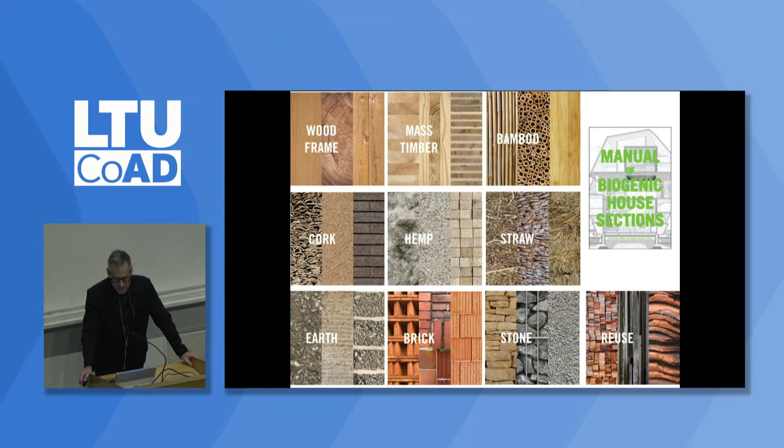So we're both excited about this and where it might go. The basis of the book is looking at nine dominant plant and earth-based materials, plus a final chapter on reuse. Reuse has always been present within our practice, as Carl mentioned. The cliche is that the most green building is the one that already exists. We know that, but it allows you to do other things.

It allows you to rework existing structures not meant for the purpose you're now adapting them for—in this case, a theater that had been turned into a department store, which we then figured out how to turn into a contemporary art center.

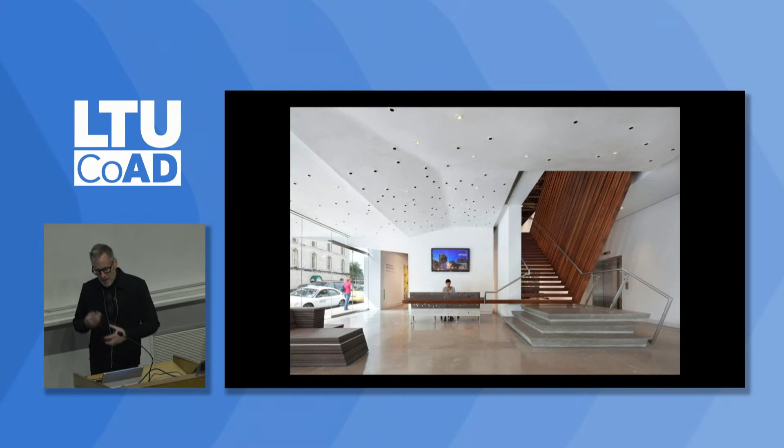There are really interesting possibilities that come from these inventions—looking at ways to reimagine the storefront from the 1950s department store as a site of contemporary art, thinking about tactical uses of staircases and vertical circulation to get up into the main gallery, and looking at ways to modify and accentuate the friction between what exists and what's new.

In this particular project, we were able to repurpose the building we'd already repurposed, modifying it about five years after we initially completed it by adding a rooftop deck, and thinking about how these urban buildings can have impacts back out to the street itself.

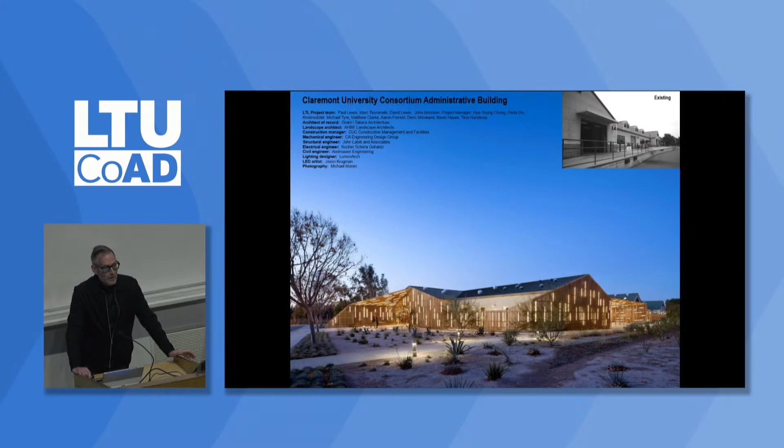This particular project was an administrative headquarters for the Claremont University Consortium. What was great here is that we were working with what used to be the maintenance building on campus. You don't get to do mostly column-free, 100-foot wide, 35-foot high ceilings in a one-story office building—you just don't.

But we were able to do it, looked at modifying it through bringing in light, had to put all the mechanical systems in the ceiling, developed a custom baffle to shroud some of this infrastructure, and that became the aesthetic of the entire project—making an open office for 100 employees because of the unique nature of the existing building.

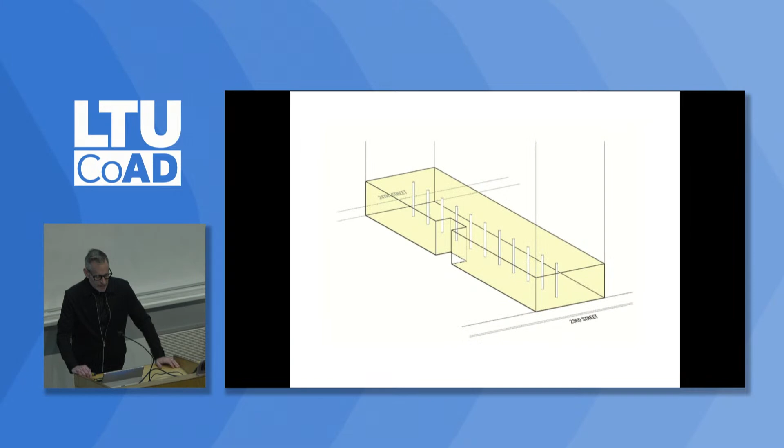A more recent project is Poster House. This is a through-block space between 23rd and 24th Street, and we had to imagine this as a site for a museum of the poster. We knew that would require museum quality controls in terms of humidity.

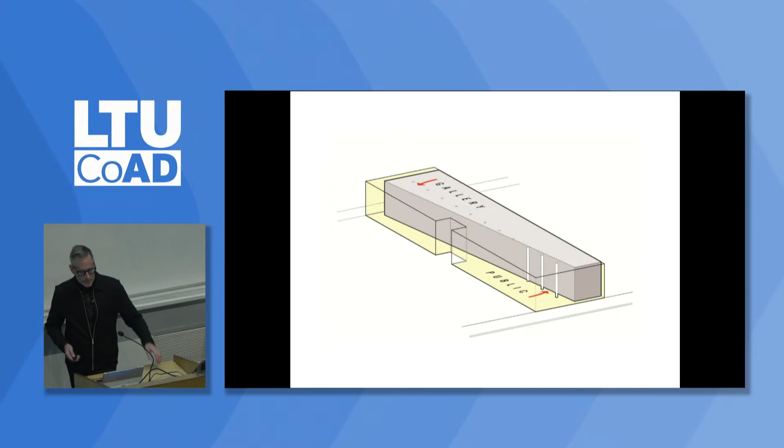So how do we find a way to let the pass-through happen, which was super interesting about this space, while having this acoustically and mechanically shielded gallery space within it—a kind of nested volume. Through various sketches, we looked at ways to strategize the relationship between a simple series of intersecting lines so they would focus on the door leading in from the promenade space into the gallery itself.

We developed the project with one part being about a 220-foot long piece of millwork. I'll say that 24th Street is about two feet higher than 23rd Street, so the floor slopes the entire way—there's nothing level in it. It was a bit of a challenge, but what we liked was the ability to keep the street. The site of posters is originally the street, so we wanted to have a street within a museum for posters.

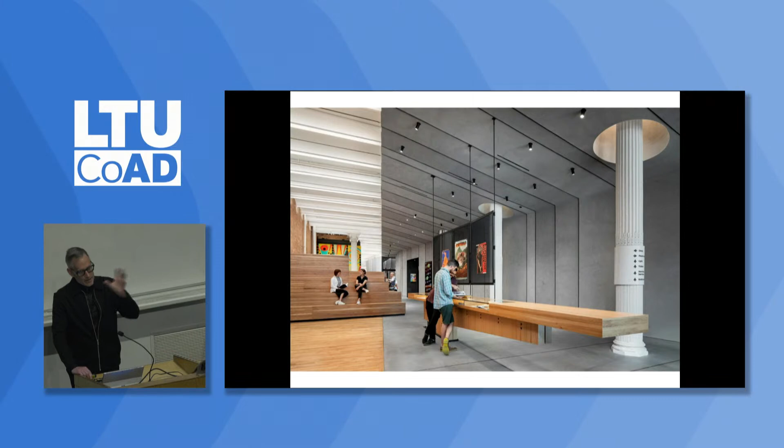But we got this interesting friction between the older shell and the new shell, which you see on the right—this kind of split screen effect between those two. Looking at healthy building materials, on the right is basically a clay surface, and on the left, most of the millwork was done with white oak.

The gallery itself is more conventional, but throughout the project we were looking for negotiations between the new pieces we would put in and the residual historical components here, the cast iron columns, illuminating the capital but also hiding it at the same time.

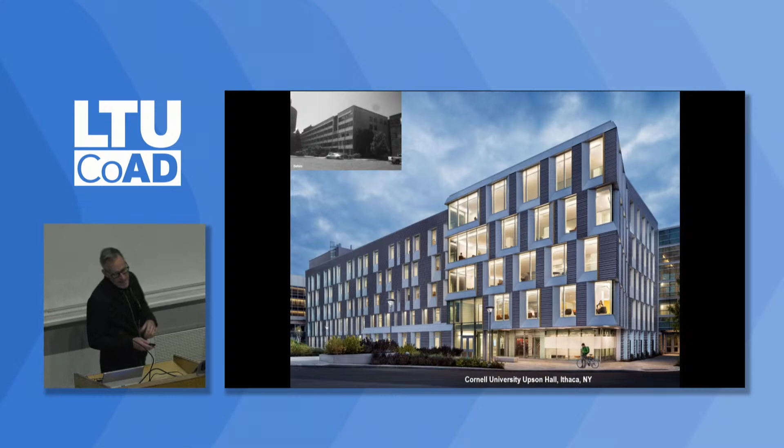Again, with a lot of this adaptive reuse work, the interest has been questions of operational carbon. We've been attentive to solar angles, performance, and insulation, and we've not been as attentive to questions of embodied carbon. I think this is something the profession as a whole has not focused on, and it's something we've shifted our practice to attend to.

So let me set the stage. What we're going to do for the rest of the talk is combine two different books: one is Manual of Biogenic House Sections, and the other is a pamphlet we did that developed five specific houses using plant-based materials as a catalyst for their architectural form.

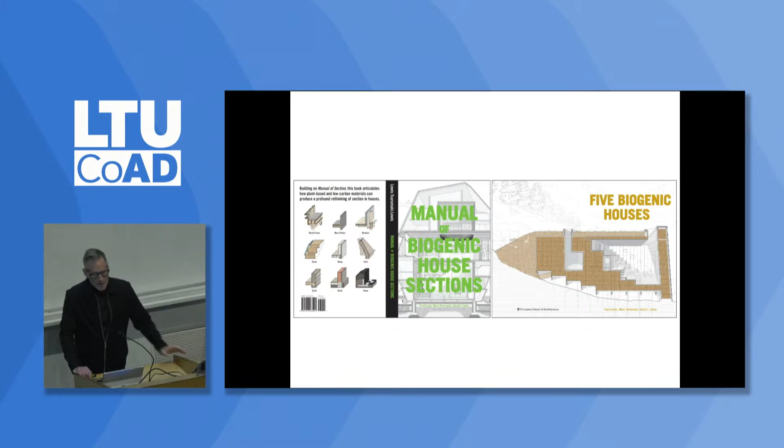But just to back up—this may be well known to you, and it's not an argument we're making, it's one that Architecture 2030 or the Carbon Leadership Forum or a number of organizations have made. But the short version, for those who've been living under a rock the last couple of years, is that we are not in great shape with the climate.

In particular, we're going to have to find a way that our policies get us to about a 65% reduction in 7 years—increasingly more dire and difficult to get to—in order to reach net zero by 2050. We know that buildings account for 39%. You've seen these stats before. If you haven't, you should have.

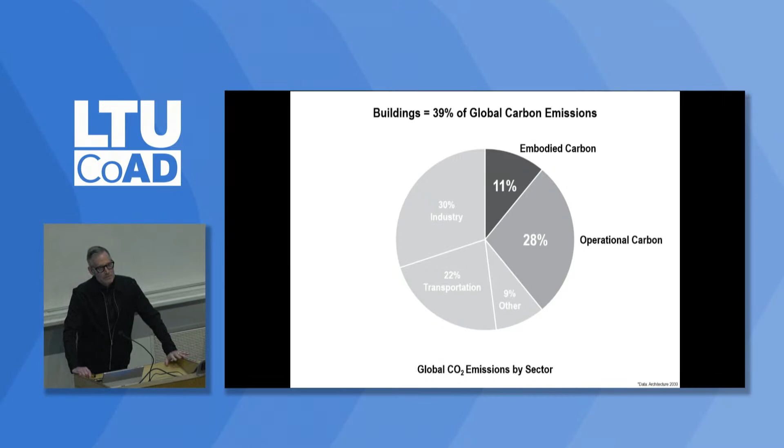Operational carbon, which has been the focus—the heat and energy that goes into keeping a building going—has been the larger chunk, but that's where most of the energy has gone. Embodied carbon, basically the energy necessary to build the building, the upfront carbon, the material, all the energy that goes into making the building itself, is only 11%.

The difficulty is that if you map out carbon emissions within the building world between now and 2050, about half of it is actually embodied carbon. So we're attending to only half of the problem.

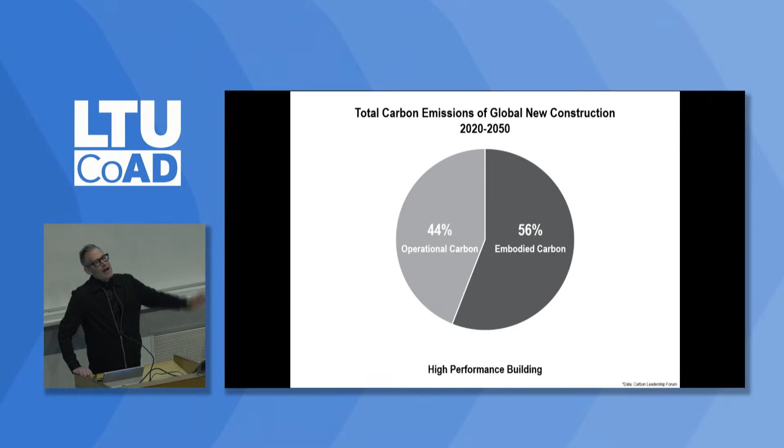And then there's the added difficulty that the more high performance you make a building, the more efficient it is, the higher percentage of that ratio goes to embodied carbon. So as we make better, high performance buildings, often with greater insulation, glass, and steel, we end up with buildings where the payoff time to get the return on that embodied carbon investment takes 30 years. That's one of the tricky things we're dealing with.

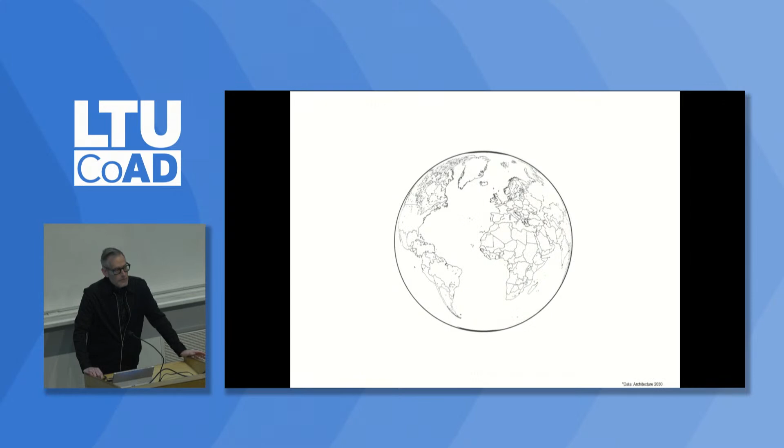The other issue is, as much as we love reuse, we're not going to be able to reuse our way into the future because there's just not enough building stock out there. There's demand for something like 2.5 trillion square feet of buildings by 2060.

So the question becomes, how do we rethink the legacy of modernism? Modernism, defined largely by concrete, glass, and steel, is highly dependent on a huge consumption of fossil fuels. It tends to be linear and extractive. It assumes a kind of global deployment of materials, and the question of environmental and health impacts have taken a secondary status to cost and, frankly, getting stuff done.

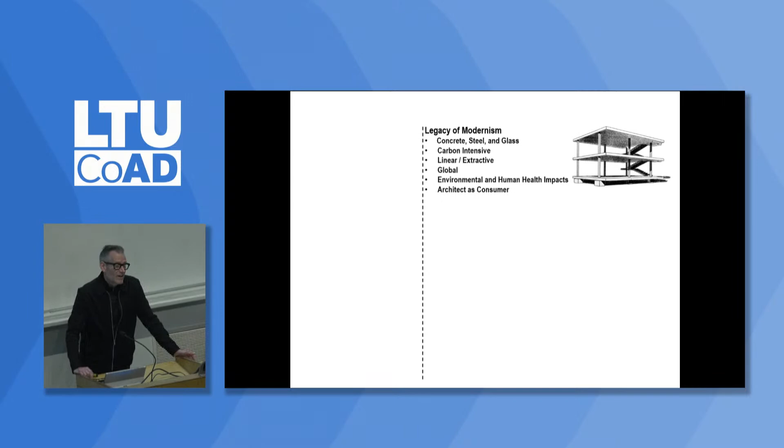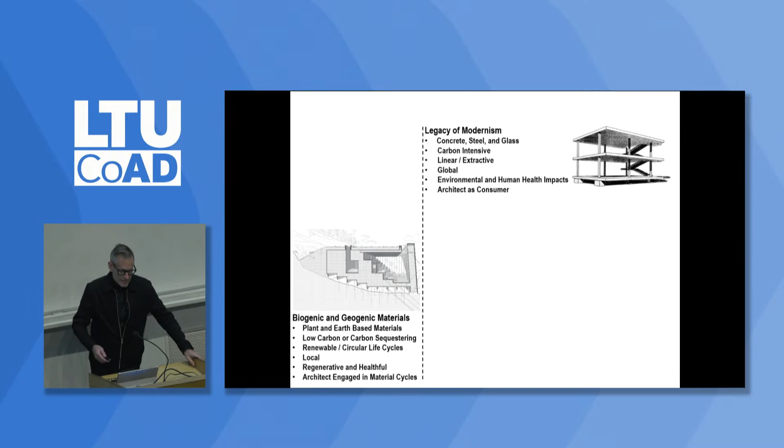And also, weirdly, architects just become consumers in this—we specify products. Instead, I think there's an optimism about a possible biogenic and geogenic future where we're working with plant and earth-based materials, low carbon if not carbon sequestering materials, thinking about the whole life cycle of those materials, trying to work local as much as possible, and getting the benefit of not only decreased carbon but also materials that are healthy both in their sites of production and their sites of use—so you don't have the off-gassing that you have with petroleum and chemical-based products.

That's really the focus of the book: what are the materials that are currently being used that are plant-based or earth-based material? What are their life cycles? And more importantly, how have they been used to make innovative buildings?

If we're not using architecture as a point of seduction, if we're simply reconstituting buildings from the 19th century, we're not going to get very far. Design doesn't have any agency if we're reconstituting models or building types that are just about a kind of return to some nostalgic past.

So one of the questions, I'm sure you're thinking, well, why the hell are we doing houses? We shouldn't be doing houses, we should be doing housing. I completely agree. The problem is that when we set out to do the book, we wanted to find examples of buildings that were built from these materials, and there are not a lot of housing or large-scale buildings that necessarily are built from these materials. So that was one factor. We wanted to draw buildings that already existed so we could prove and demonstrate that these can be done.

The second thing is that houses are a site of experimentation, and that's going to continue. We also had the fact that the book is a small format, and when you draw sections of houses, you can see the tectonics, you can see what's in the wall. When you draw big buildings, you can't see that, so that had an alignment.

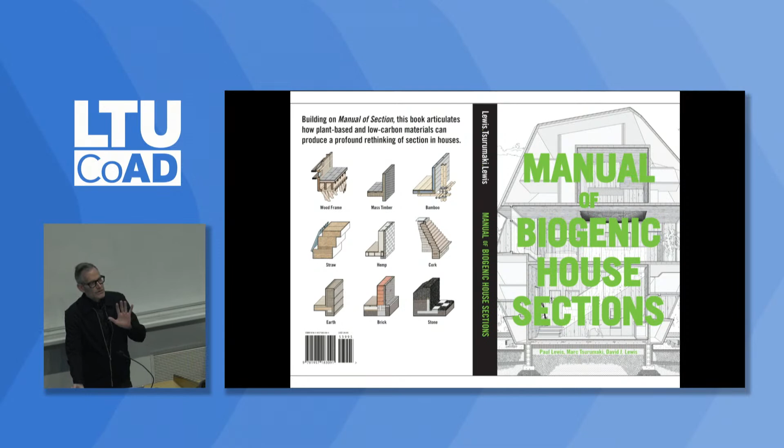We wanted to have a kind of typological consistency. And the other thing we were really interested in is looking at ways to argue for smaller scale buildings, right? So yes, houses are a problem, but a house that's 5,000 square feet is much more of a problem than a house that is 500 or 800.

Almost all the houses in the book are less than 1,000 square feet. So in a sense, the book is a critique of the current single-family home that exists in the States, which has ballooned from about 1,000 square feet in 1950 to about 2,500 square feet today.

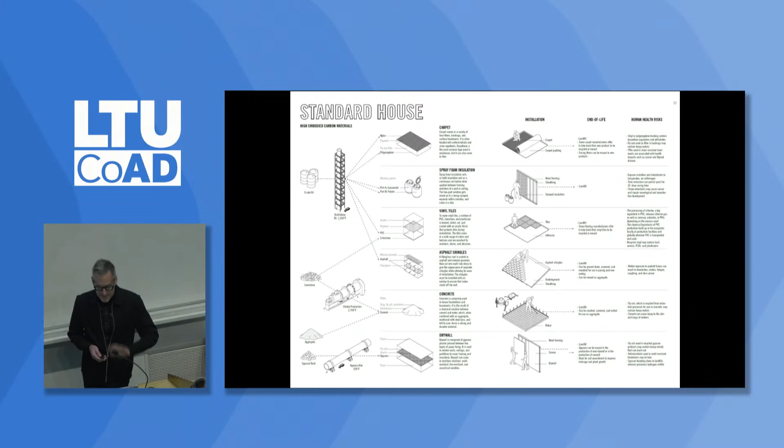There's an added problem in that most of those materials, in order to build a house that big, most of the materials are cheap, and most of those materials are coming from petrochemicals with all their attendant toxicity. They end up in landfills. I could go on at length about that, but basically it's a kind of limited life cycle, a kind of take, make, and then dump process.

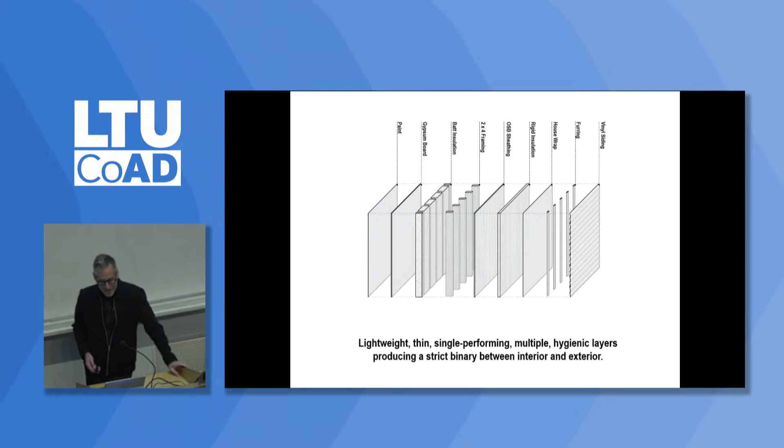They tend to be argued for their hygienic quality, and they set up a clean distinction between inside and outside. This assumption that your wall is basically going to perform and protect you hygienically from the outside.

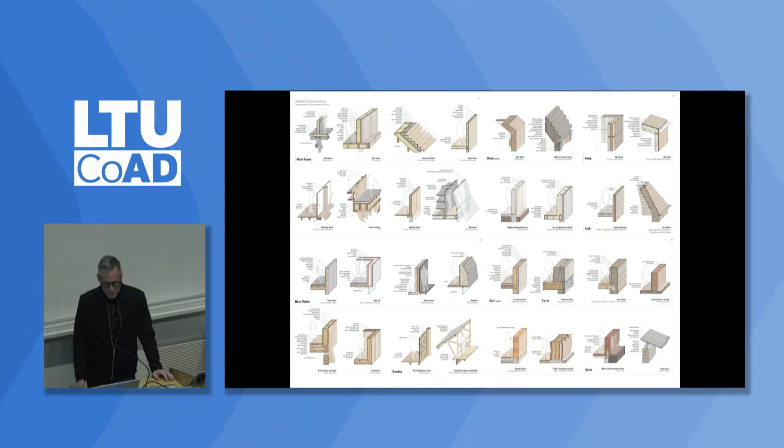Our interest in the book was to shift to things that were monolithic, things that were maybe more mono-material, heavy perhaps, and then possibly also regenerative, and to think about that as a kind of different model for how one would organize thinking about the architecture. So whereas Manual of Section looked at the role of section to generate the buildings, here we're looking at the combination of materials and also how they would produce, through their tectonics, through their inherent qualities, certain spatial consequences that were interesting.

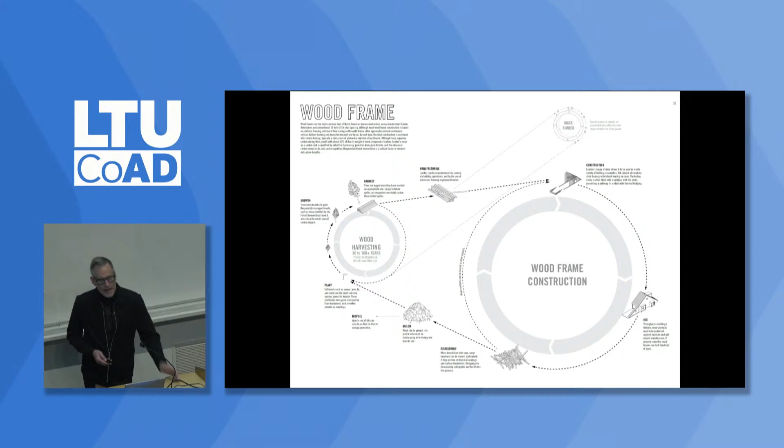Throughout the book, we start each chapter with basically a kind of classification of the carbon per meter cubed. We then map out where these things come from, what are their material paths from plant to construction, how do they get reused at the end of life or different cycles within this system. But also look more closely at what are the specifics of that plant, what are the basic steps by which you go from tree to different forms of lumber, and what are the dominant models there.

This is not meant to be exhaustive, but it's meant to give a sense of how these things go from plant to building. Each chapter has about 4 to 5 houses that we've documented through new exploded axonometrics to show what the house looks like in plan and three-dimensionally.

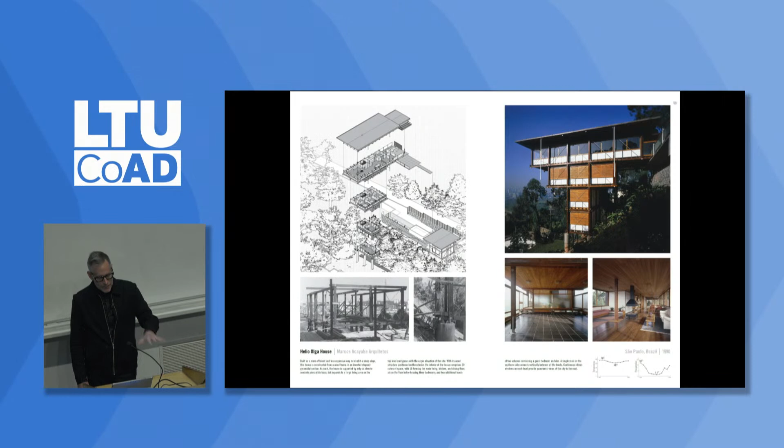We have construction photographs on the lower left, exterior photo, interior photo, and most importantly, this cross-sectional perspective that we've drawn by modeling the house in detail, having an interesting exchange with the architects.

Many of these houses are not iconic, and it was great to work with 55 architects around the world to get them to redline our drawings to make these as accurate as possible for the purposes of the book.

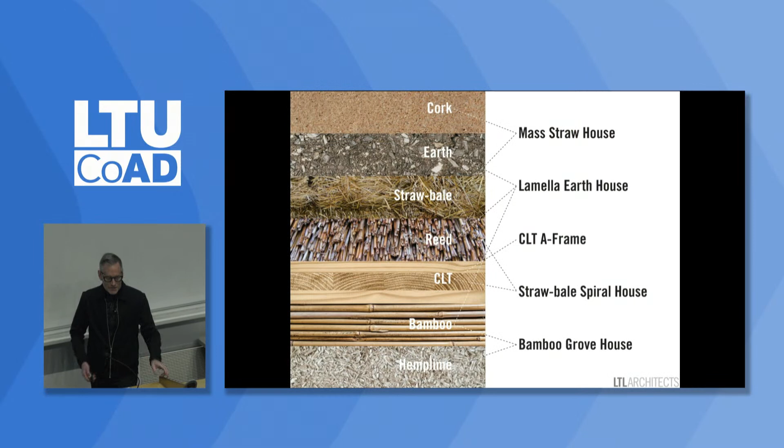As I mentioned, at the end of 4 years of working on this book, we wanted to design our own, we kept asking, what will we design? So we designed 5 houses that look at combinations of different materials and how those could be a source for invention. I'm going to go through a couple of these different chapters, show some examples, and show examples from our own work as well.

Mass timber: if you're a student, you used to be asked, what is your Rhino model made of? And you'd say concrete. Now you say CLT. So it's becoming the default.

Look, mass timber is fantastic. It's the poster child for plant-based materials, and it's a lot better than concrete and steel, but it does have its problems. What's great about it is that it's easily 10, 15 years ahead of where all the other plant-based materials are in terms of code, approvals, client acceptance, fire, all that kind of stuff. So it paves a path forward.

But it takes a long time for a tree to grow, 30 to 100 years. Even with Forest Stewardship Council certification, you're often getting as much carbon loss from the destruction of the soil. When a tree or a forest is harvested, you're often only using maybe 50% of that tree, so it's a wash at best.

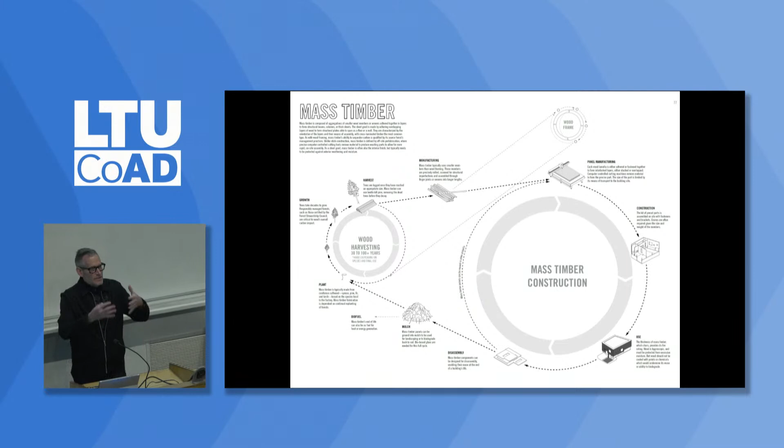There are attempts to make that better with different models like mass plywood, but it's not going to save us. Mass timber is great, but it's not going to save us, and there's not enough trees in the world to do all the buildings with mass timber.

Adhesives are a problem, so working with dowel laminated products that don't require the adhesives. There are soy adhesives on the market, which are exciting, but we're still trying to figure out where this goes next.

Most mass timber is simply a replacement for the logic of post and beam, which I think comes from other forms of construction. We became really interested in architects using mass timber for its own qualities, the idea of a sheet good that is structural and can be milled.

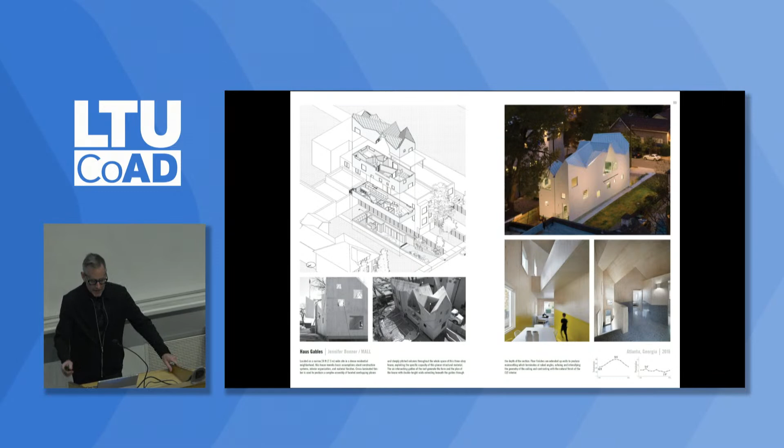Jennifer Bonner's Haus Gables is a fascinating house able to develop a complex roof gable system because of the specifics of the CLT sheet good itself. The house's whole geometry is based on multiplying these gables, and it would only really be possible at this level, scale, and speed of erection through the use of CLT.

The project that we put on the cover of the book, Ateljé Sotamaa's Meteorite, is a really weird building. If you look at it closely, you wonder, what's going on here? There are 2 layers of CLT, an inside layer and an outside layer.

That whole buffer space you see in the section is basically insulation, an air cavity that's not filled. It's essentially 2 skins, the entire building is 2 surfaces of CLT, and the outer surface just has a stain on it. Super fascinating.

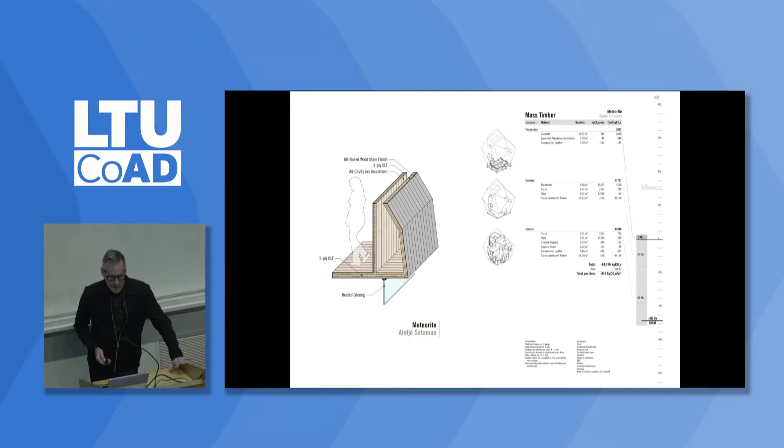It gets rid of all those layers, and it also sequesters about 48,000 tons of CO2 - actually 48,000 kilograms of CO2 equivalent.

For a house we called the CLT A-frame, we wanted to go in the other direction. Rather than milling CLT into all kinds of different parts, we thought, why don't we just use the entire sheet? Let's base a project on taking the full blank, 10 feet wide, 50 feet high, and just setting them off in pairs. At the back, you'd get 2 that would be stabilized by the cross bracing of the stair.

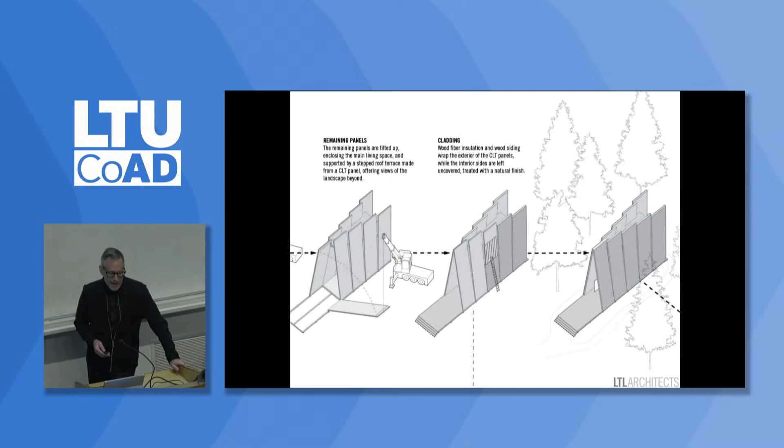And then as they work their way to the front of the house, they just basically lean into each other. At the top, you get this kind of crow's nest, an occupiable space that allows you to look out into the landscape. And on the inside, the great thing about CLT is you don't have to use gypsum drywall, and you get the finish of it.

We also like the peculiar nature of this incredibly tall, almost 50-foot high ceiling, one-story space, which took the A-frame and essentially moved it into a very, very different direction based on the logic of CLT.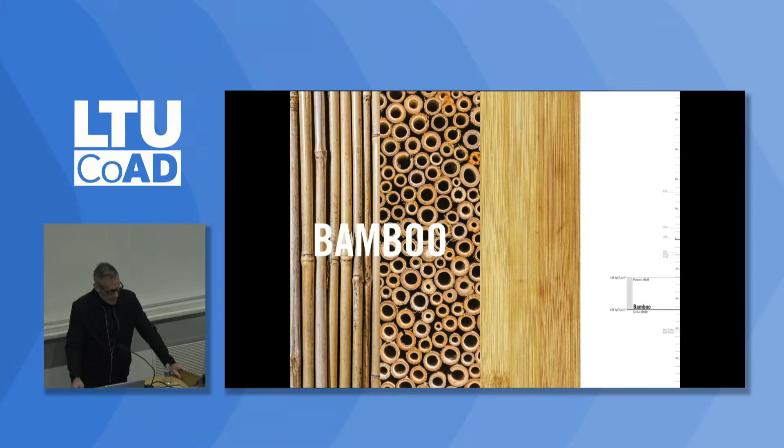All right, bamboo. Bamboo needs a lot more different ways to use it. We're just starting to see different materials that are able to work with bamboo productively. But where CLT is limited by the slow speed of trees growing, bamboo is one of the fastest growing plants on the planet. It's super prolific, and it has a higher rate of carbon sequestration than wood.

I think you can grow something like 30 feet in 3 to 5 years, harvested not by clear cutting. You basically get rid of one culm among a group, so it's constantly regrowing itself because the rhizomatic root structure remains. It tends to be cut into smaller strips to be glued together, so the question of the adhesive is one of the key issues.

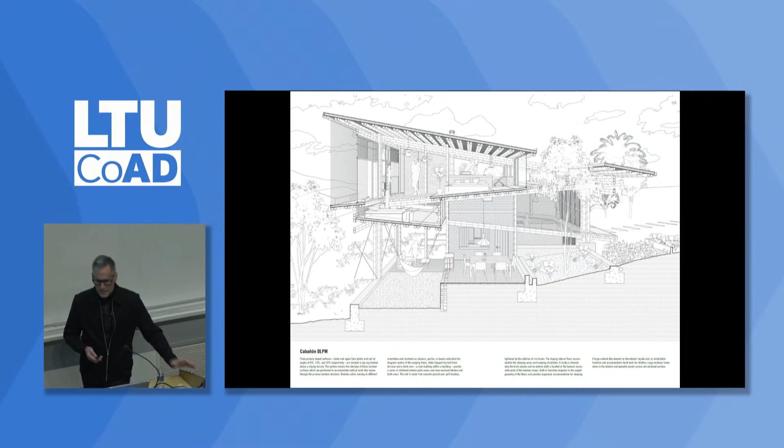But you can also use the culm as a full structural component. Even though it has natural variation, it can provide structural approaches and be tethered together. So this house in Ecuador basically uses the bamboo as a structural frame, interestingly producing a kind of cross bracing that is also the circulation and the floor structure moving up through the house. It's kind of a fantastic inhabitable incline plane moving through the domestic space.

Or in Anna Heringer's housing prototype, you get a weave of bamboo forming a very unique, unprecedented external skin that protects against the initial impact of the elements, a light solar screen that protects a little bit the rammed earth sleeping interior. But the skin would only be possible due to the flexibility, cheapness, and strength of bamboo.

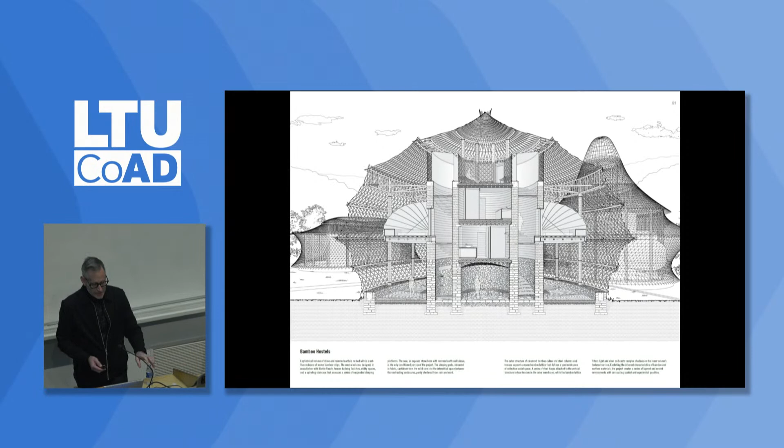All right, so earth. There are people doing fantastic work with earth. It's exciting to see how it's starting to emerge in different forms. It's everywhere, one of the oldest building materials. Its thickness can work structurally as thermal mass. It can absorb and balance humidity.

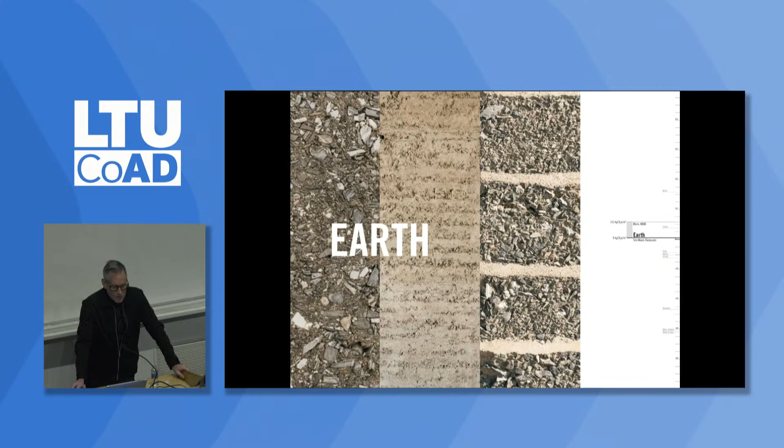Typically, it's better if clay is the binder itself, and then your carbon emissions are quite low, particularly if it's acquired locally. Unfortunately, a lot of rammed earth we know about is dependent on fairly high levels of Portland cement. So the question is figuring out a better, lower carbon binder, whether it's lime or just the clay itself. But it's great because it moves from a liquid to a solid state.

And so you get this interesting possibility of how do you, as a designer, work at those different stages. Is it with the block? Is it with the wall? Is it with 3D printing?

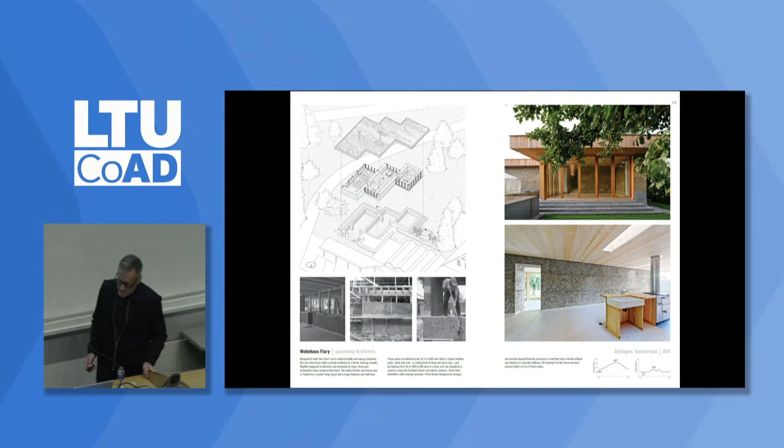One particular house that we really liked, the Wohnhaus Flury, was really a combination of earth loam with straw, a kind of cob wall, and it was just cut with a spade. These are about 32 inches thick. But you get this fascinating contrast between the roughness of this spade-cut, very thick wall, and then the timber ceiling and floor. The sandwich of the ceiling and floor is then filled with straw, so it's also a straw house.

As the insulation, you get the large overhangs that protect the earth walls from erosion from rain. So it's basically a single finish that's structure, cladding, insulation, and interior finish, although the structure is augmented by a series of 2x studs located within the thickness of that wall.

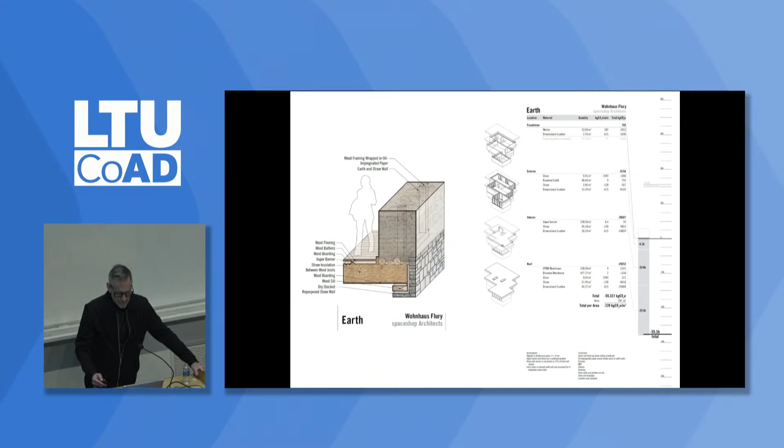And I think at this point, one knows a lot about, you see a lot of 3D printing. There's not as much 3D printing with clay. I think there's some experiments being done in this building on it, so I'm excited by that.

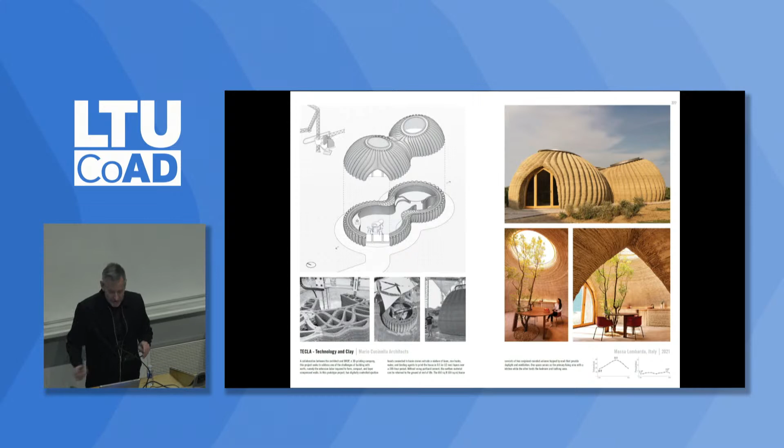And I think this is super interesting. So a group out of Bologna, Italy, WASP, working with Mario Cucinella Architects, 3D printed this house in about 200 hours. There's the duration, about a half-inch layer over time.

And it's as a test case, it was fascinating, in part because the walls were hollow and then filled with rice husks to form the insulation. So the 3D printing allows you to have greater structural capacity with reduced weight, and then be able to look at the walls as being insulation as well.

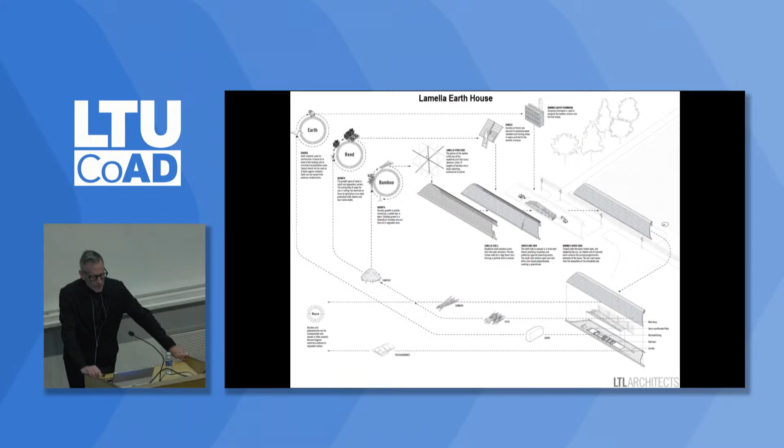All right, so we wanted to find a way that we could work with both bamboo and an earth house by nesting one inside the other for this kind of new model of a farmhouse. And here we are looking at ways we could produce an outside shell, a kind of lamella structure, which is basically an interlocking of self-similar lengths of 8-foot bamboo with similar joints that would then be assembled together in a diagrid weave, allowing us to develop relatively inexpensively and quickly a single spanning space.

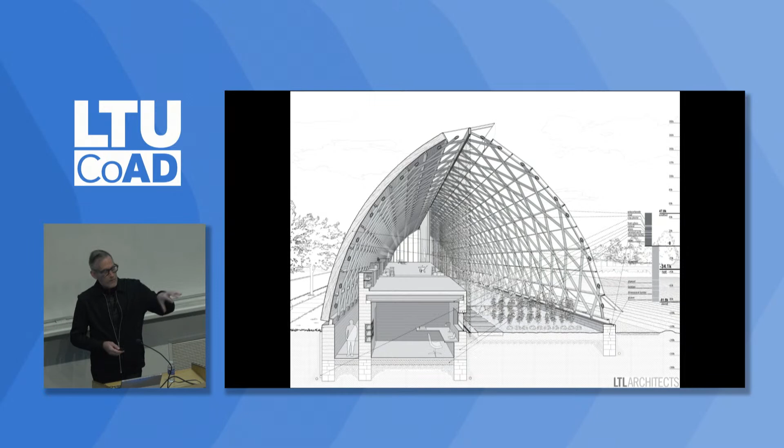And then placed inside of that would be an earth-based house, largely excavated from the ground and also embedded in that ground, which is where the domestic space would occur. So you get basically a gradient of temperatures between the outside and the inside, this interesting play between what is a garden, what's a greenhouse, what's the actual house.

And you also get this 30-foot by almost 300-foot long space that's quite large, efficiently done. The north side was clad in thatch for insulation, and the south had a plant-based polycarbonate to help facilitate the greenhouse performance.

All right, so the last three materials that I'm going to go over are all ways to think about insulation. And I know everyone's, as soon as you say that word, everyone gets excited. It's insulation. Oh, it's the best.

So how many semesters of insulation do you study? All right, I ignored insulation for most of my career, right? It was just an R value, right? You just wanted an R value. You never saw it. It was in the wall as long as it was cheap, and that's all that mattered, right? Unfortunately, insulation is actually where a high percentage of carbon has to be located.

And most of the insulation products that are on the market now—spray insulation, XPS, EPS, batt fiberglass, et cetera, mineral wool—these not only have high carbon emissions, but they're also often very toxic. If you've ever worked with batt fiberglass and you come away feeling bright and happy, you're not doing it right. It is awful. It's really nasty stuff to work with.

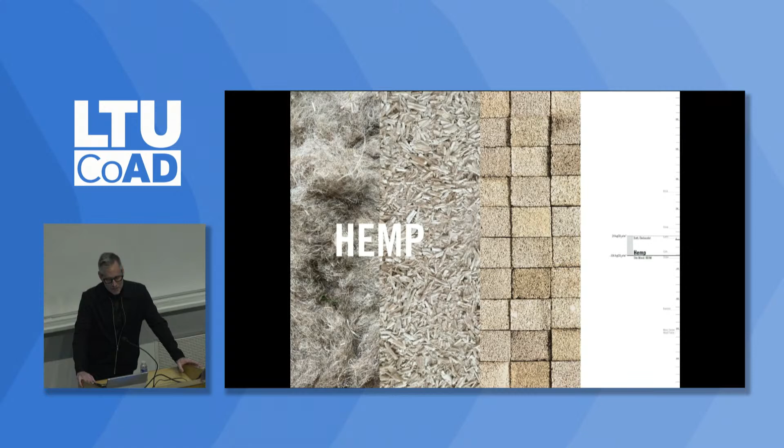And if you want to have some fun, just try taking a match to any XPS and see what happens. It burns like you wouldn't believe. So there's trying to think about what are the possible replacements for insulation and what that would mean for the nature of the wall.

Hemp. Hemp is pretty incredible, right? It grows quickly, about a foot per week. Reaches maturity in about 3 months. There's some places that you can get 2 growing cycles in a year. It has a long root system. It can actually help regenerate soils, grown with minimal water, fertilizer, and pesticides.

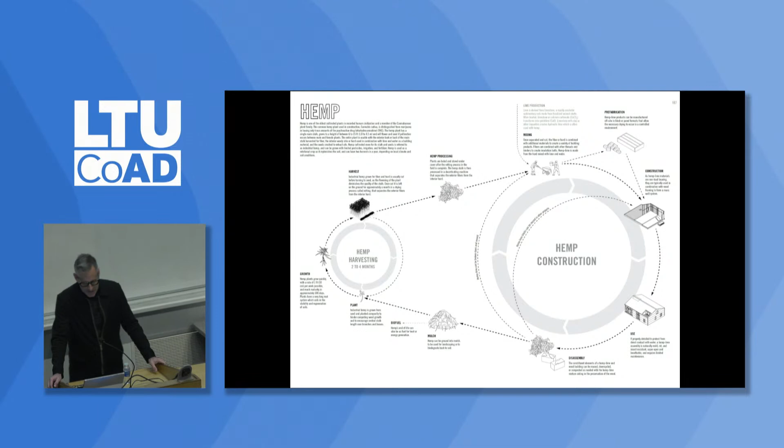In order to translate hemp into an insulation, you either work with the fiber itself and turn that into a batt insulation, or you separate the fiber from what's called the hurd on the inside, shred the hurd, and combine that with lime to form a kind of hemp lime, inappropriately sometimes referred to as hempcrete. It's not a replacement for concrete, it's not structural, it's an insulation. It's the air cavities within the fiber that help it resist thermal heat transfer.

It can be sprayed on site, it can be compacted on site, it can also be formed into blocks, packed into walls, prefabricated, et cetera. Hemp has a lot of possibility. One of the downsides to hemp is that you have to grow it in fields that might have been used for something else, so there are some displacements of agriculture that have come from hemp, but it has regenerative capacities as a plant.

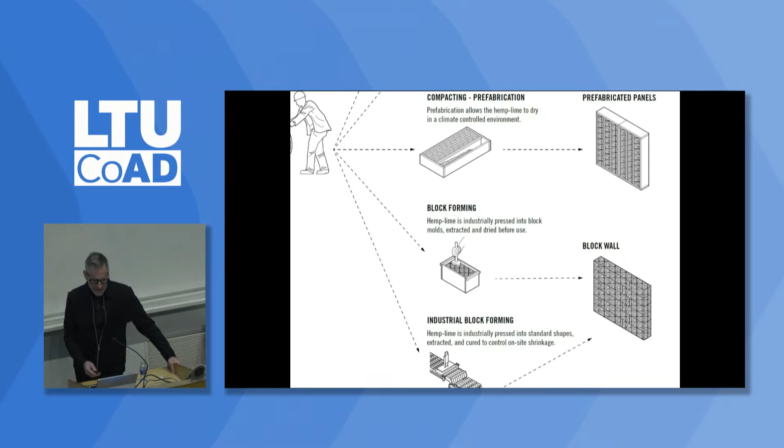The second type of insulation is cork. Cork is amazing, it almost does everything. It can be structural, it's water resistant, it's thermal, it's antifungal, it has acoustic properties. If you like the smell of cork, it has great olfactory benefits, and as I mentioned, it can be structural.

The downside to cork is there's only so much of it, and it takes a long time to grow. It's carved off the bark of a cork tree, and tends to only grow in the Iberian Peninsula, so Portugal and Spain predominantly. Most of the cork used in architecture now is the excess of the wine bottle stopper industry.

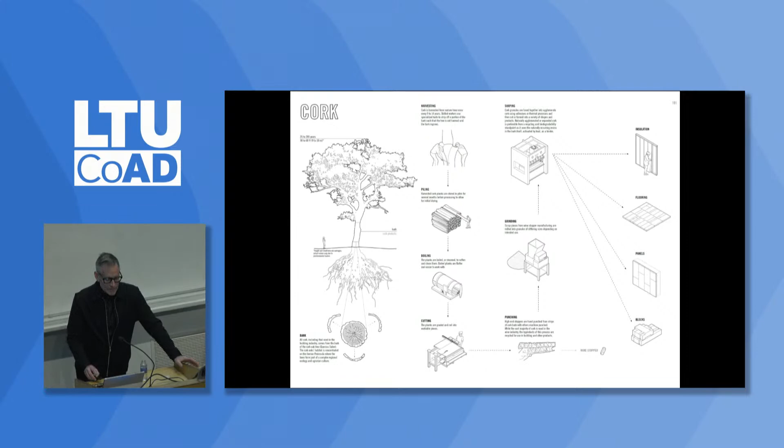So, all right, that leaves us with the third material: straw. And so the rest of the talk, as Johnny knows, is all going to be about straw.

Straw is everywhere. It's a waste product, it is not being used. Right now, the amount of carbon sequestered in straw around the world is estimated to be about the same as the carbon released in the making of concrete in any given year. So if one talks about carbon sequestering technology, it already kind of exists, it's there as straw. We just haven't harnessed or found a way to embed straw within building materials in a convincing and effective way.

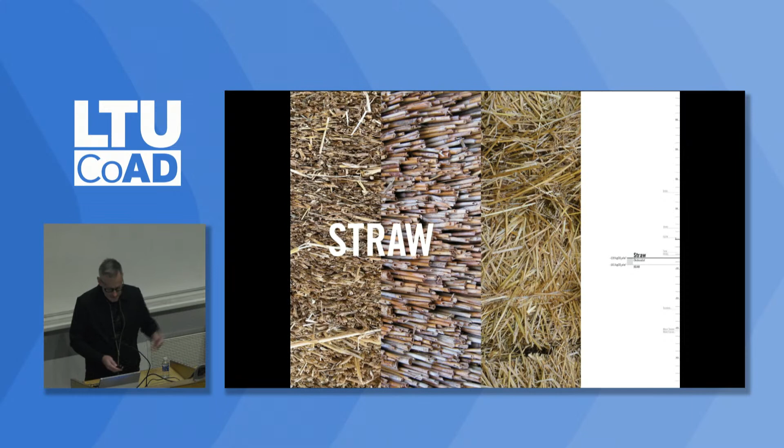Most straw is left to decompose, it's not really used as much. It's used as a kind of animal bedding, but most of it is left to decompose or burned.

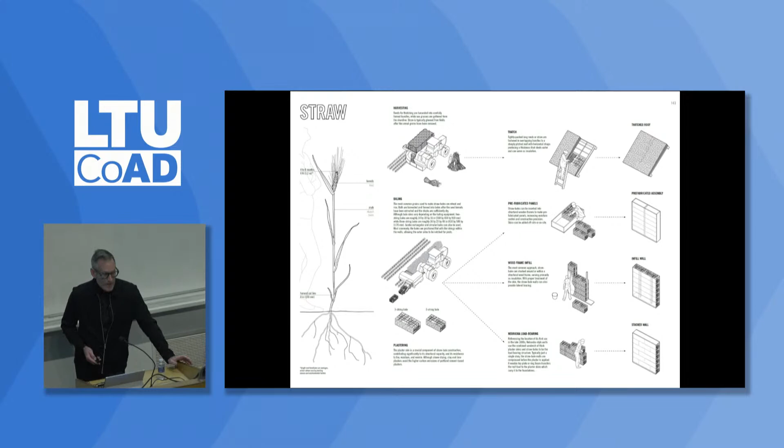It's fast, it's cheap, it's plentiful, it's resistant to rot, and it can not only be an insulation material due to the air voids within the straw, but if sufficiently compressed, it can be a load-bearing material. In fact, one of its early forms, the Nebraska wall assembly system from over 120 years ago, was because you were working with straw bales. Those bales come compressed out of the machine at a sufficient level to be used as a building material. Historically, straw is stacked up as bales, a convenient form, and then plaster is added to the sides, about an inch if not more.

That plaster, whether clay or lime, forms the resistance to fire, rot, moisture, insects, etc., and helps resist the vertical load. In the California Building Code, where a straw bale is incorporated, it's because of the plaster that it's able to work. That's not the only way - you can embed straw within an existing stud wall as insulation, or it can be formed into prefabricated panels, whether 2x panels or cross-laminated timber.

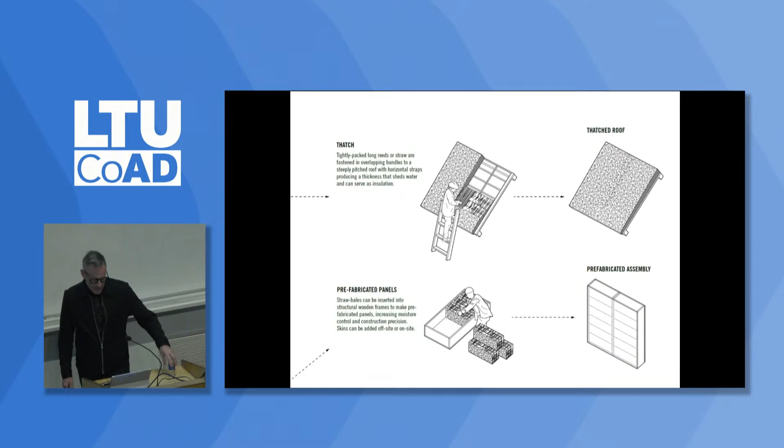Thatch is slightly different, I won't talk about it too much. One of the most interesting examples we came across was Atelier Schmidt's Gartist House, which uses jumbo bales. These are really big bales, 30 inches by 50 inches by 100 inches, 650 pounds each. The baling machine produces them at a density where they're actually load-bearing, so you can corbel the ceiling out of these. There are rings of CLT at every four blocks to help stabilize and tie them together laterally.

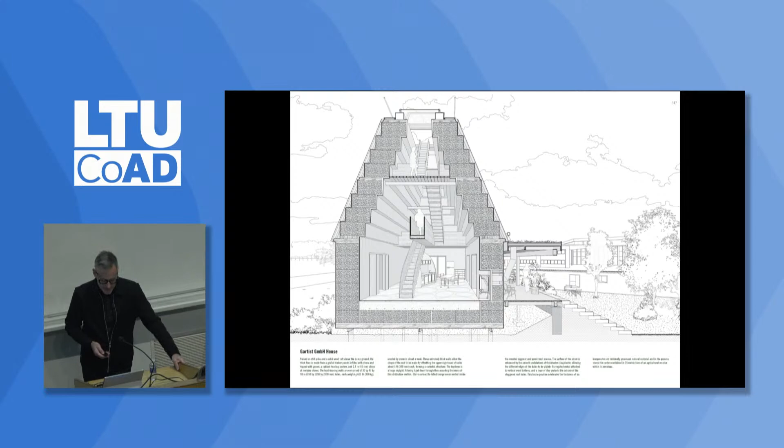Effectively, the load is carried not by the skins that are put on, but by the straw, and then they're clad on top with metal cladding to protect the plaster. It's a super thick building, and it sequesters about 84,000 kilograms of CO2 in this relatively small building.

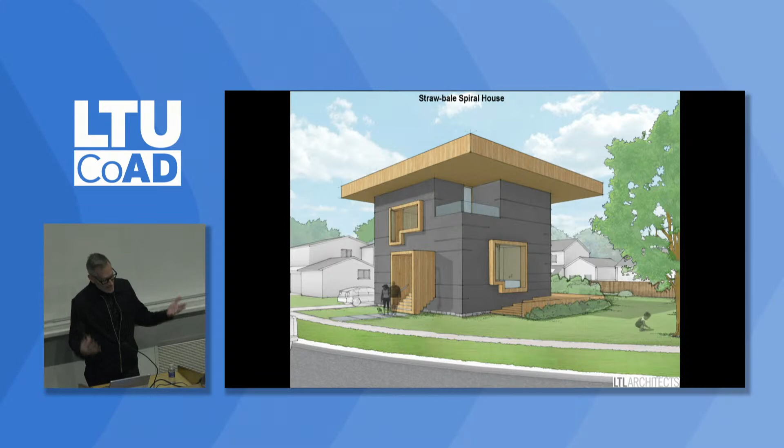So we became super interested in straw and wanted to figure out a way to use this thickness not as a problem. We've been taught for the last 100 years that thin is better than thick, lightweight is better than heavy - the legacy of modernism, as if it's unquestioned. The idea that you could have a thick building that sequesters a huge amount of straw, a material that isn't that expensive, became kind of intriguing to us.

So what happens if we started to combine straw as a solid and thought about it as something you remove items from, rather than building through addition, but design through subtraction - combining a kind of void within a dense thicket of straw. You combine those with voids of cross-laminated timber.

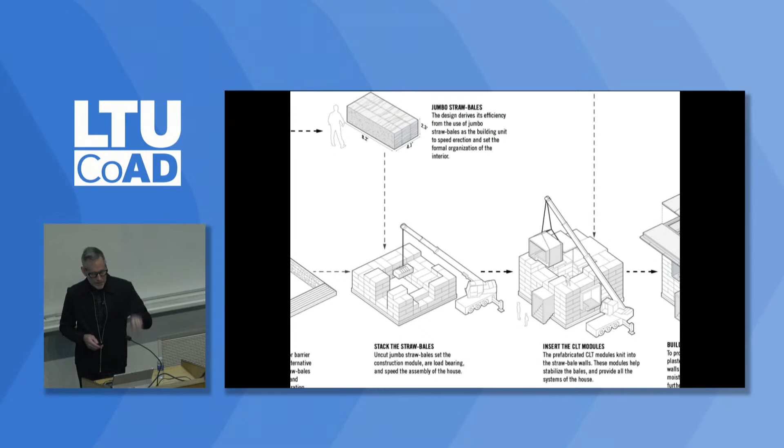So in a sense, this house is based on placing a series of cross-laminated timber, four-sided, relatively small rooms that are then positioned into voids within this otherwise solid donut of straw. The CLT is stitched together, so it helps stiffen the straw, and the straw helps stabilize and position the CLT.

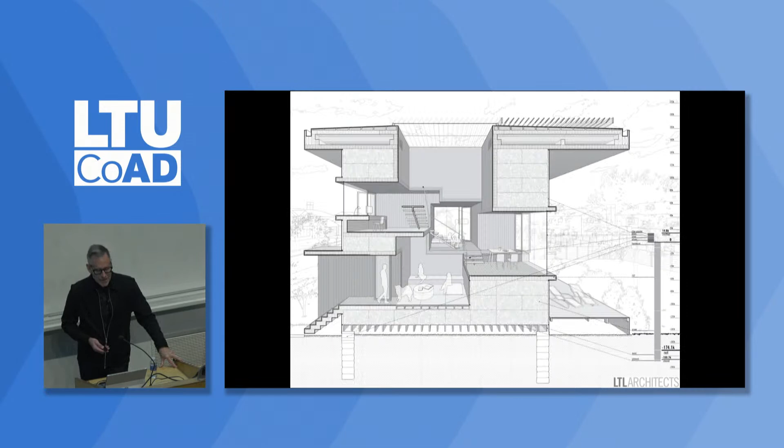There's a central skylight, large overhangs to protect the clay plaster on the straw, and the central skylight brings light down to the middle. You essentially get this sequence of rooms carved up through the thickness of the straw, so in a sense it's a kind of Loosian space wrapped around the inside of this relatively small house.

You go from the door all the way up to the roof terrace, walking from room to room, if you will. We really like the idea that the window, the space, the CLT room, and the apertures and voids within the straw are all one and the same thing. So hierarchies between different parts of the architecture start to get reworked in different ways.

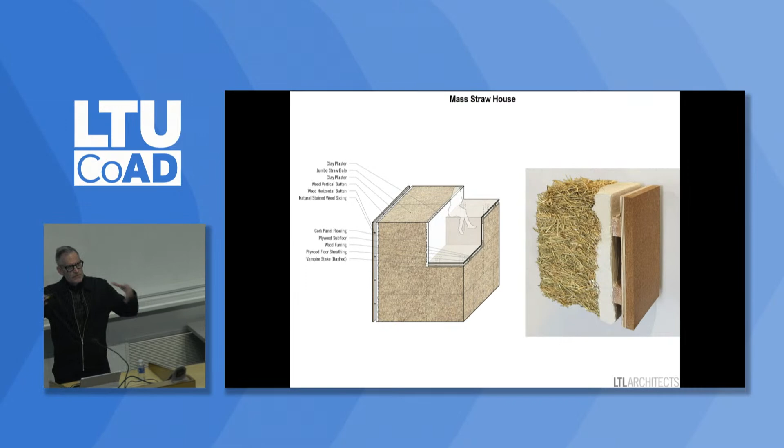The other straw house we looked at combined two different strategies for working with straw. One was a set of walls running a kind of corbelled wall perpendicular to the contours of this hill, and the other was this thickness or podium of straw carved in a way a bit more similar to the last project we showed you.

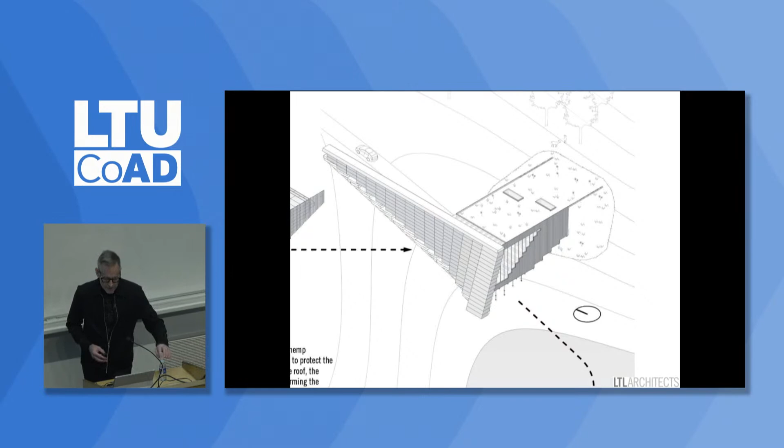These two masses of straw would then be tied together through roof box beams infilled with straw, with a roof basically clad in clay plaster, and then another layer of straw, unprotected, on top of a series of hemp fiber panels. We like the idea that that top layer would actually decompose.

You often get the question, aren't animals going to eat this? And we're like, yeah, they don't eat straw because it's not hay. Hay is a vegetable, straw is not. But nonetheless, if they wanted to, that's fine—we'll let them eat the roof, or burrow their way into it. We like the idea that the building would blend itself back into the landscape.

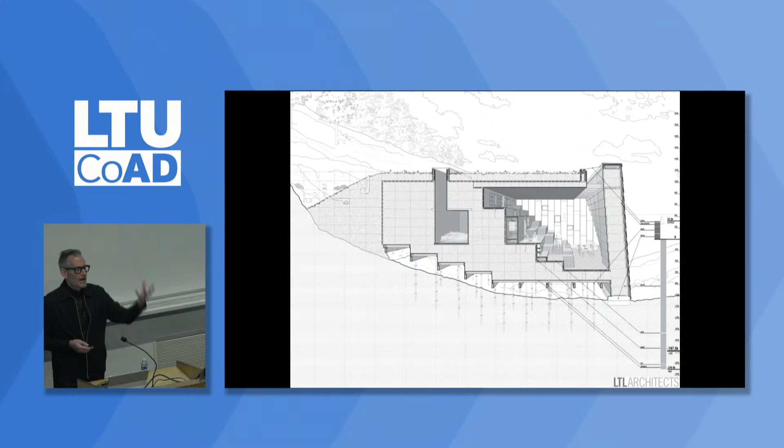But then you get this interesting dynamic between the collective space for the house, more like a terraced landscape between these two straw figures, and the private bedrooms and bathrooms carved back in with skylights—really quiet. Can you imagine, and I think it's probably the New Yorker in us wanting to get away from noise, that these would be incredibly quiet rooms.

We really like the fact that in this section, there's almost as much mass and straw as there is space. It's all on screw piles, reducing footprint by getting rid of as much concrete as possible.

So anyway, these were experiments trying to figure out how we could imagine an architectural set of inventions that come from the material, not just using those materials as a replacement for existing high carbon materials, which we thought was really important.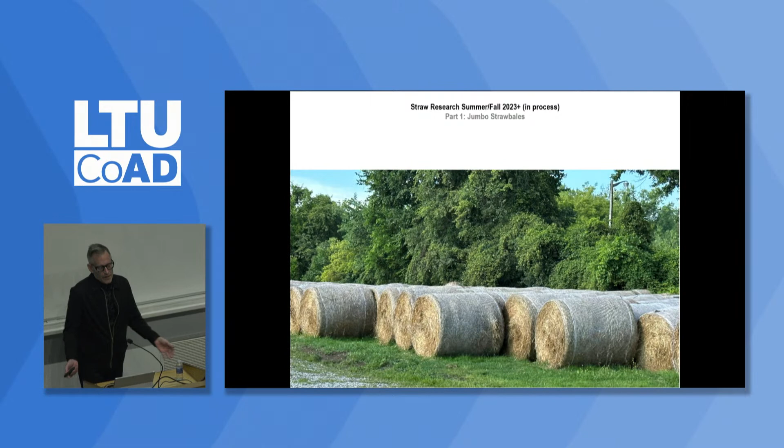This summer we've been working on a couple of different experiments with straw that are continuing into the fall—this is stuff very much in process, and it takes two parts. One is we've been looking at the jumbo bale, in the form of round jumbo bales which can be highly compacted, like 140 kilograms per cubic meter and up, so they have the ability to be both load-bearing and insulation. That's really the holy grail we're looking at here—can we actually get load-bearing insulation?

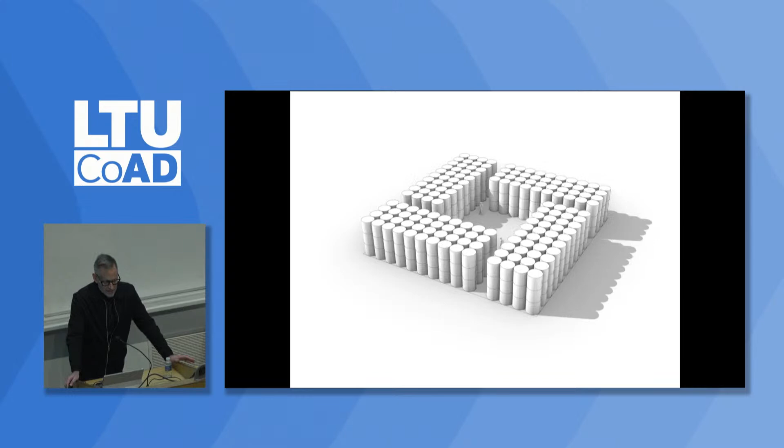Once you do that, you start to get into very different spatial qualities, like the ability to carve these thicknesses that are possible. We like the idea that all of a sudden the design language starts to shift—these things are neither columns nor walls, they're somewhere between. They can be fields, they can be figures, they can be rigorous or random. And when you start stacking them up, you start to get architecture.

So we had done an early childhood education project, basically a preschool, for lack of a better word, a few years ago. This was in Bentonville, about 240 children from very young up to age 5. They were organized around playscapes appropriate for their ages.

So you had a series of classrooms that then work out to the play spaces outside. There was this interstitial space where they could go out but still be within the confines, so if it rained, the kids could still get outside. And then all the rooms would link out to that.

This was all done with healthy building materials. There was no plastics, no latex paint. We used mineral-based paints. There were no plastic toys. Everything was not just low VOC, but no VOC. But we were working with common building materials—steel studs, drywall—and that was frustrating.

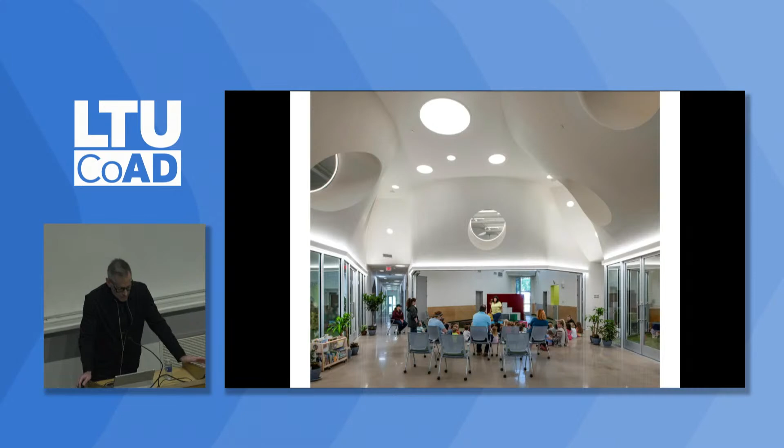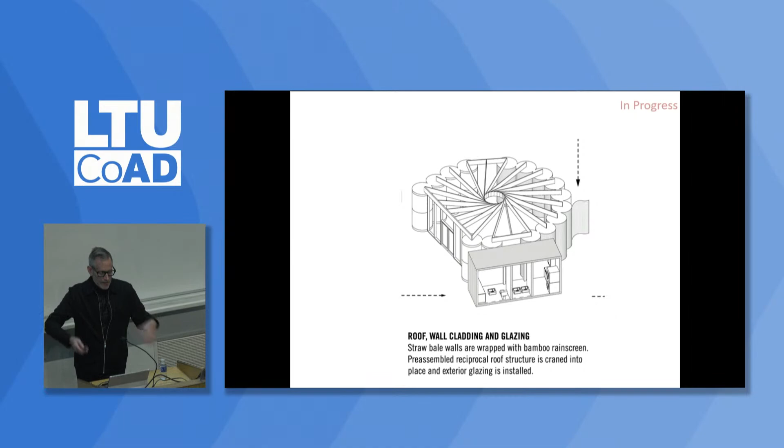So our question was, could we imagine this building type with these jumbo straw bales, working with LVLs as a ceiling structure, basically developing a reciprocal frame where these things tie into each other, spanning off these large-scale jumbo bales, producing a room with a skylight in the middle. Those rooms could then be aggregated together using CLT prefabricated bathrooms between the different classrooms, effectively getting the same or similar size school, but all made out of a single story stacking of 3 layers or 2 layers of the jumbo straw bales.

You can see this was just being worked on by Kyle Reich in our office. We haven't quite photoshopped the lower right, so that's why there's no shadows there. So we're getting there, but this is from yesterday.

We have another version of the school just working with straight bales, not the round bales, but that's also still in progress. All right, the last thing I want to show—bear with me, this is in progress—we've been trying to figure out how we could actually compress straw and then hold it through a binder to make it a load-bearing insulation.

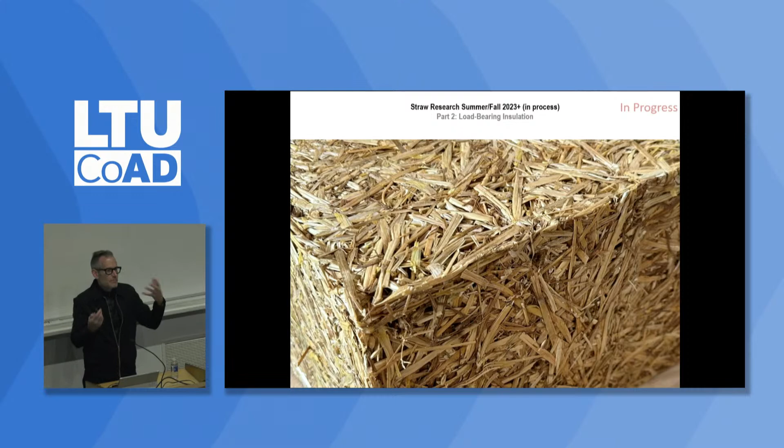Most straw that is compressed into walls, whether it's EcoCocon or Afterwall or Croft—Croft is a design-build organization out of Maine doing super interesting work—is basically compressing the straw as insulation within a stick framing, a double stud. So the 2x framing plays the structural role, and the straw plays the insulation, which is a cleaner way to get through code. We were interested in whether we could actually compress straw so it's dense enough to be load-bearing, and bind it without having to default to the frame, finding a way to get the straw itself to be load-bearing.

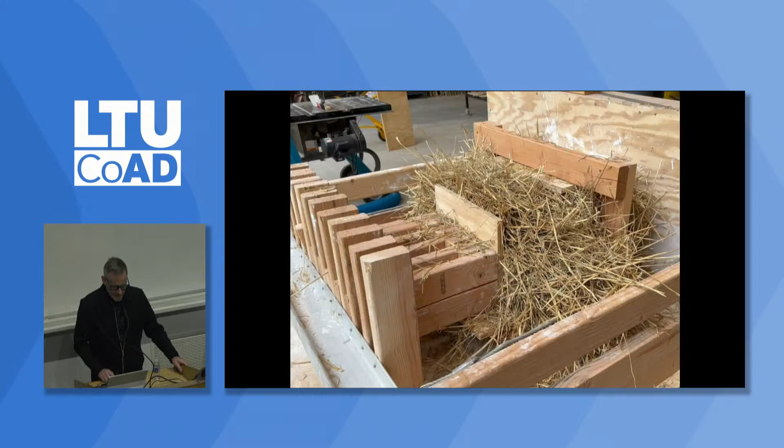We made this compression machine, which is kind of fun. It allows us to basically pack straw to get to 120 kilograms per cubic meter, even 140—we managed to get to 163. The problem is holding that tension has been difficult.

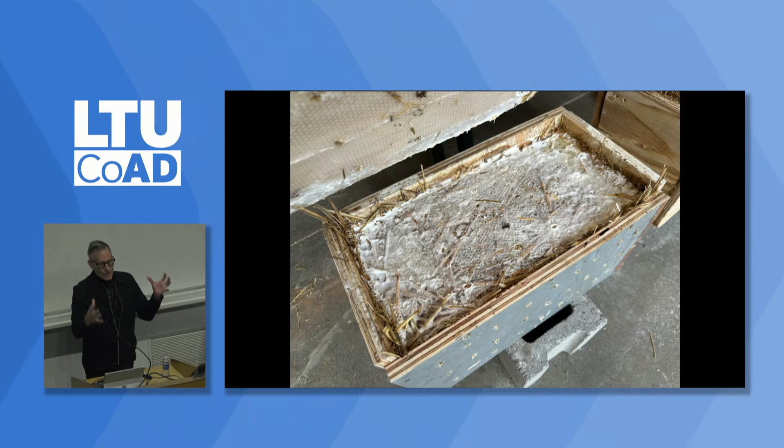We've tried a number of different binders. Here's glue, just as an initial test. Mycelium was a disaster—I was actually thankful, I was like, mycelium is not going to save us, but that's another issue. It's great, but the problem with mycelium is when you compress it into straw, it only grows in the outer inch or two, and the middle remains basically kind of rotten. That's part of the real problem: if the binder is too encasing, it keeps everything in the middle from drying. So the difficulty is how do you get it to dry properly while holding that compression. A lot of these, when we pulled them out of the mold, started to explode out. But with mycelium, you can see here, it didn't penetrate into the depth.

We made these 8 by 8 by 16 inch blocks, not because the plan is to make blocks, but it was a testing module that seemed appropriate. The plan is to make prefabricated units full scale at the scale of a wall. It's not a block system, because then you'd have to regrout it, undermining the structural premise.

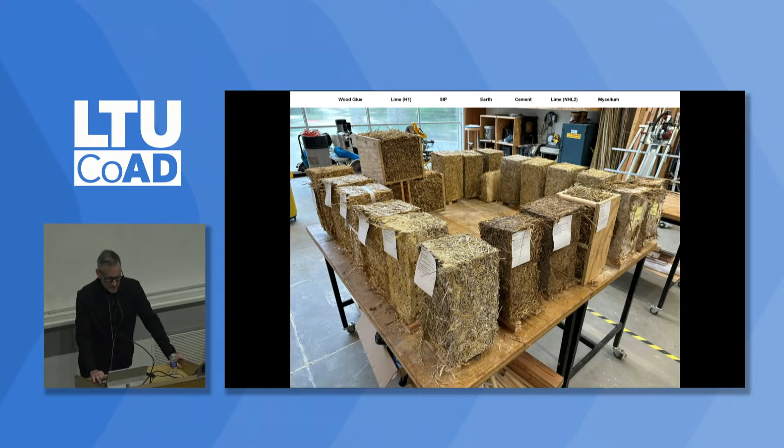So we developed these frames. We had to let them dry for about 4 to 6 weeks. They did kind of work, and we've managed to get a range of these different test blocks—wood glue, lime. There's a SIP model that's stitched together. We worked with earth and cement, just to see if that would work. Different versions of lime, and then the mycelium. We're also trying to work with a soy-based binder and even a kind of geopolymer. Again, this is in process.

And then even if we work with a stitch system, a structure just using the skin, but holding that compression in—can we get that to work?

We had to cut these blocks down even more in order to put them into a compression machine. These are the blocks with 4-inch by 4-inch chunks taken out of them, which caused some problems because it re-released tension when we ran them through the bandsaw.

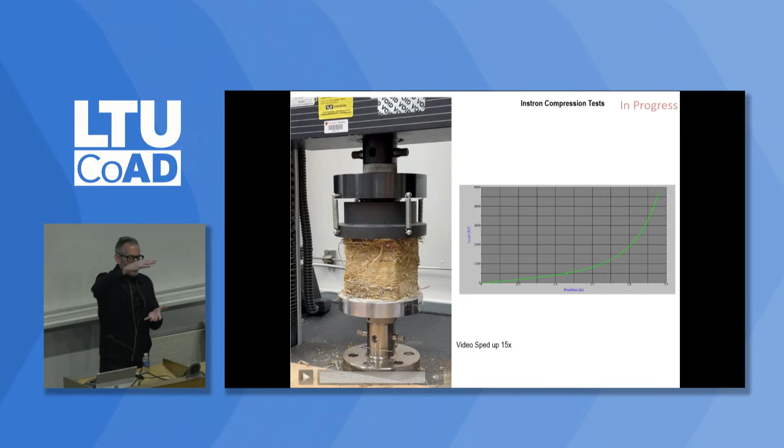But we did get some interesting results from the compression system—this is sped up about 15 times. You see it doesn't deform at all on the outside, and it springs back. Part of the problem is that the first 1 or 2 inches compress because tension had been re-released, and we need to find a way to compress it properly. It's a nonlinear relationship to force—it kept taking on more and more load, an increasing amount, until it reached the limit and hit the safety factor of the machine, which stopped it.

So we're curious to see how we can make better blocks that are more pre-compressed so they can take on greater load. We're also doing a series of R-value tests—if you ever had an Easy Bake Oven, this is our version of it. It's a 60-watt light bulb inside, with slots for about 6 of these blocks around the periphery.

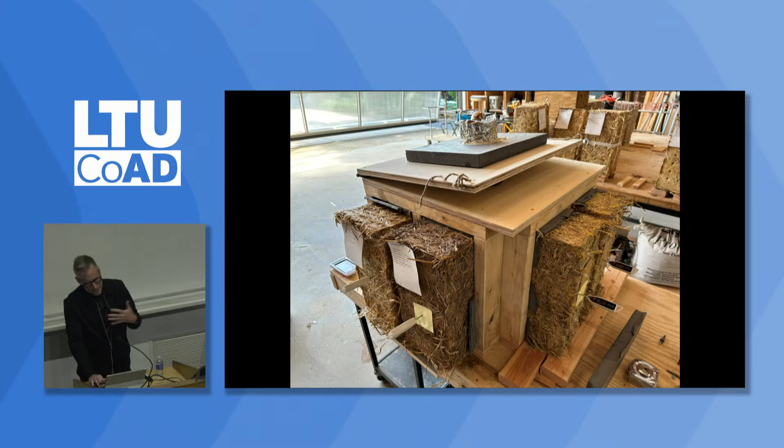We measured the thermal mass—how long it took for the heat to work its way through. Not surprisingly, the thermal mass of the foam was the worst, and the lime-based one was one of the better performers. We're now working with more precise sensors embedded inside the straw at about 3 inches in, getting values commensurate with what we expected—somewhere between R2 and R4 per inch, which seems appropriate.

The plan is to continue developing this—we never thought we'd be at this stage, kind of making straw to see if we can get there. Part of the interest is that we argue the straw bale is to architecture what the log cabin was: it's fine, but not a great architectural form, and there are other ways we might approach this. So we felt we had to get our hands dirty and see where we could take it, and that's where we are.

But just to conclude, we're worried, but we're sufficiently optimistic that there's a possible new way to move forward that is fundamentally different from the 20th century reliance on modernism—not only the materials of modernism, but all the spatial assumptions we've inherited. There are some interesting, intriguing, and open-ended possibilities for the future. It's just that we have to do it really quickly. So thank you very much.